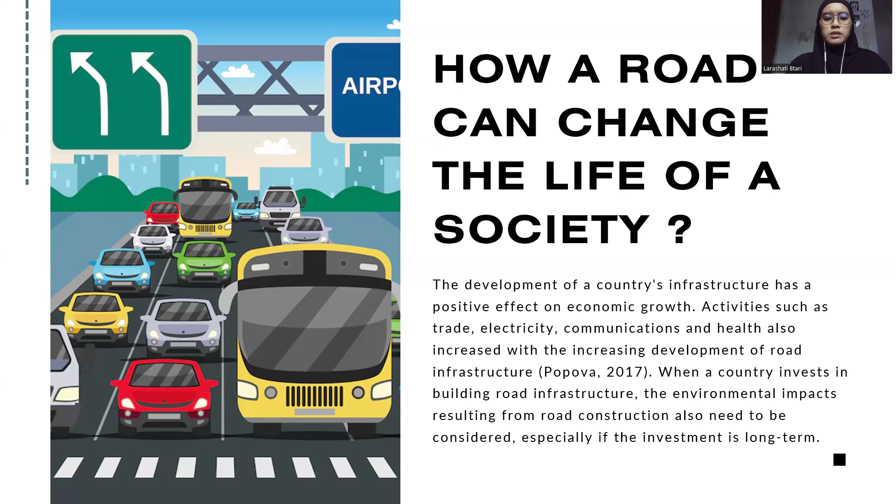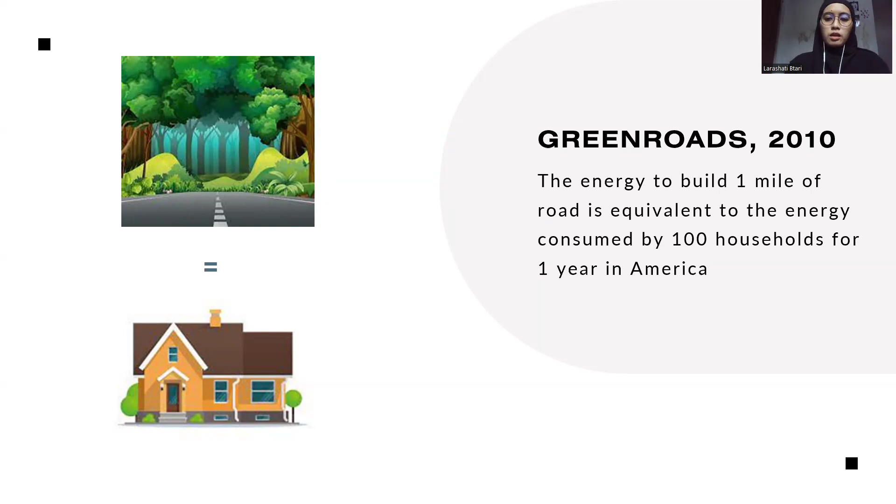According to Park and Han in 2015, the construction industry is the largest contributor to pollution, depletion of natural resources, waste, global warming, and climate change. The energy to build 1 mile of road is equivalent to the energy consumed by 100 households for 1 year in America. The carbon emissions produced to build 1 mile of road are equivalent to the carbon emissions produced by 210 passenger cars in 1 year.

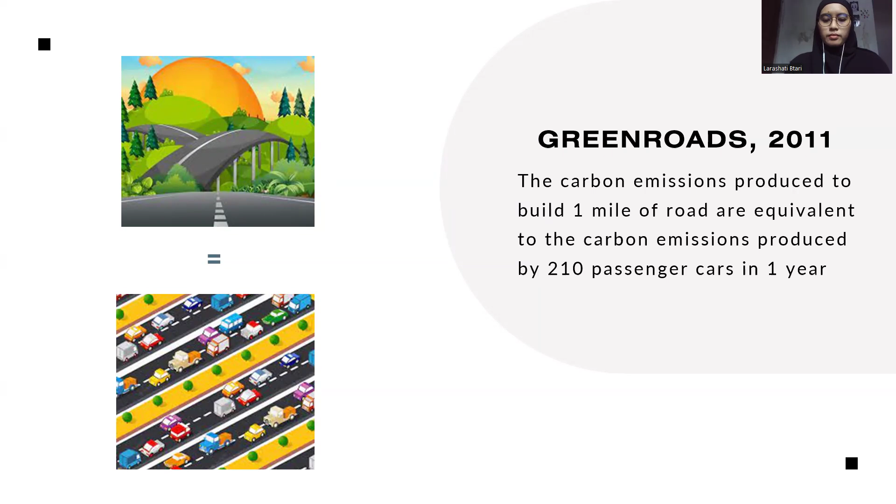So the question is how to minimize environmental damage due to construction, especially road construction. In the past, most road projects only aimed to promote economic growth and create jobs. Therefore, throughout planning, design, construction, maintenance, and repair, the environmental impacts were often overlooked. The construction process not only generates large amounts of waste and pollution, but also consumes large amounts of natural resources. Therefore, a sustainable approach needs to be applied in construction projects, especially road construction.

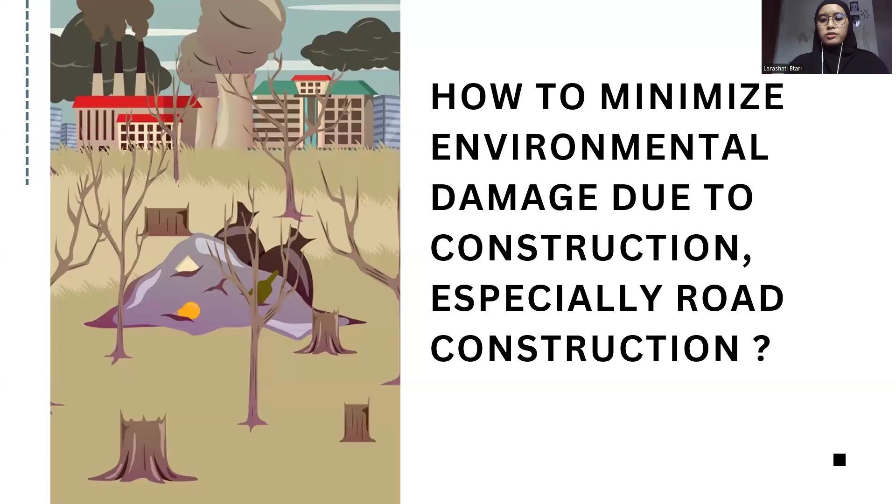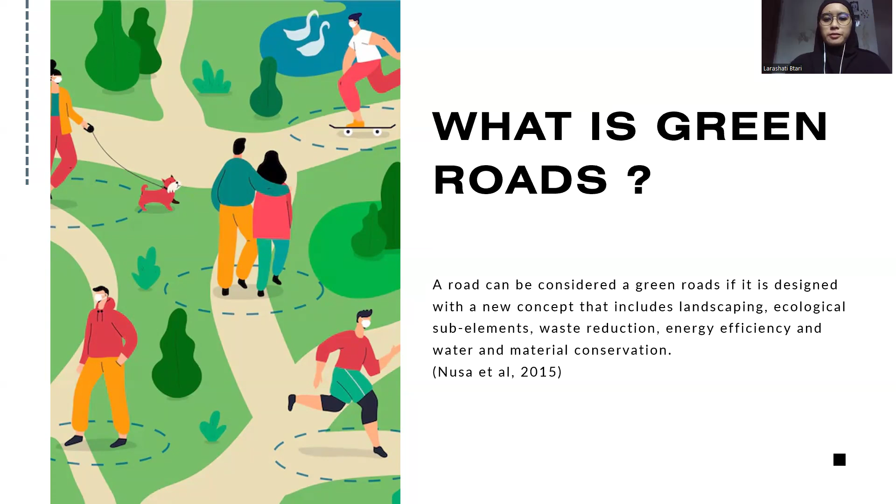Green roads are road construction projects that are planned and developed to a higher level of sustainability than existing standard practices and use green and low pollutant materials during the construction process. A road can be considered a green road if it is designed with a new concept that includes landscaping, ecological sub-elements, waste reduction, energy efficiency, and water and material conservation. The green road concept not only focuses on environmental protection but also benefits local communities by providing employment during construction.

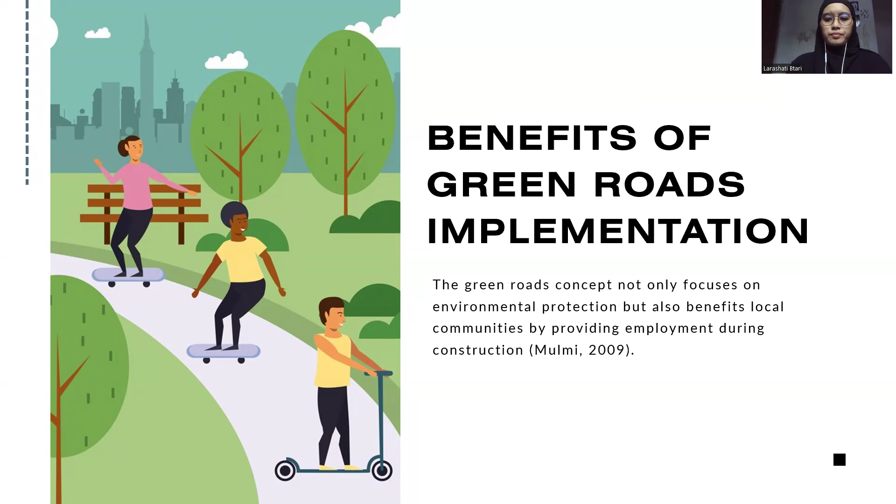Green road ranking guidelines in Indonesia consist of 5 categories. Number 1 is environment conservation: water, air, and nature. Number 2 is transportation and society. Number 3 is construction activity. Number 4 is material and natural resources. And the last is pavement technology. These categories are further divided into 35 subcategories and 84 criteria.

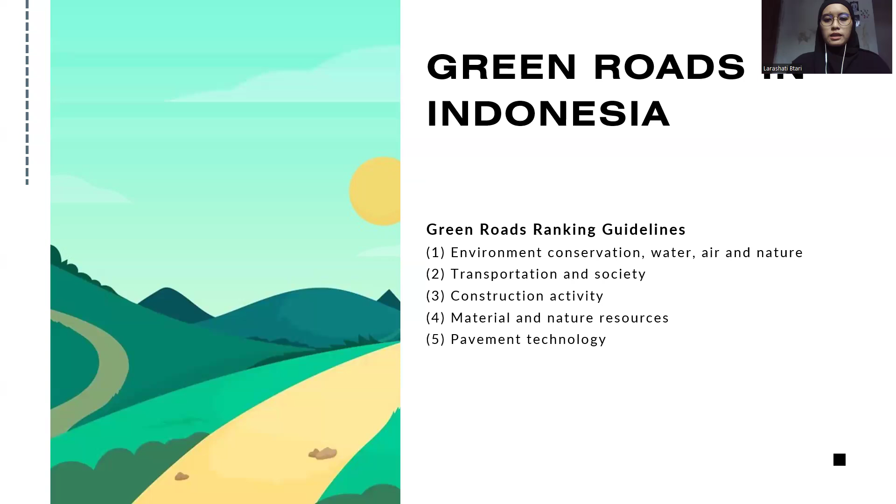The aim of this research is to model a framework for green roads implementation in Purworejo Regency with ease of implementation and waste reduction criteria. The framework can be used as guidance on implementing green road construction for stakeholders in road construction projects and bridging the gap between industry and academia.

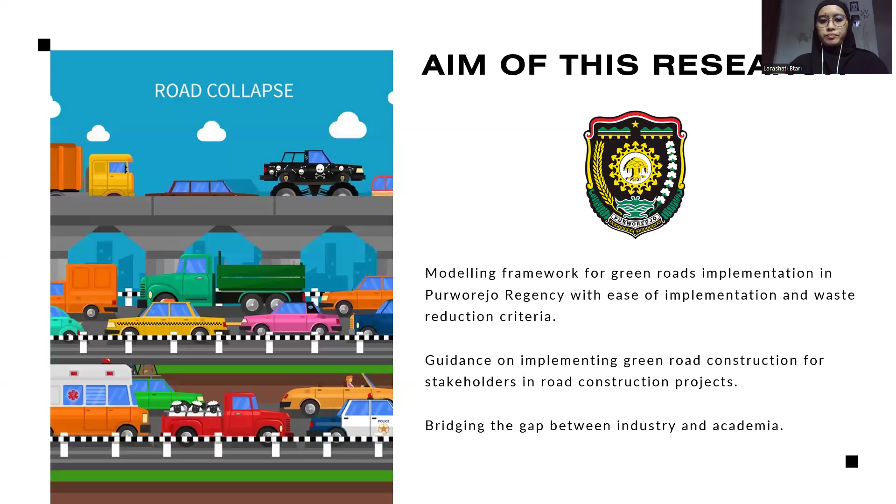This research uses primary data and secondary data. Primary data is responses from respondents obtained through filling out questionnaires, and the secondary data is data related to stakeholders who are involved in road construction projects in Purworejo Regency. The respondents of this research are the core stakeholders involved in road construction projects in Purworejo Regency, consisting of owners, contractors, and consultants.

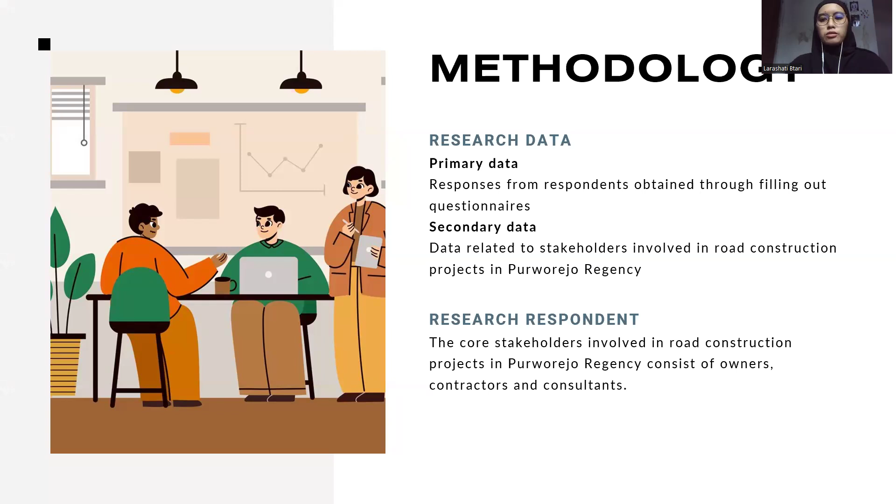Data analysis used in this research is the technique for order preference by similarity to ideal solution, known as TOPSIS. TOPSIS is used in this research because the concept is simple and easy to understand, computationally efficient, and has the ability to measure the relative performance of decision alternatives in a simple mathematical form.

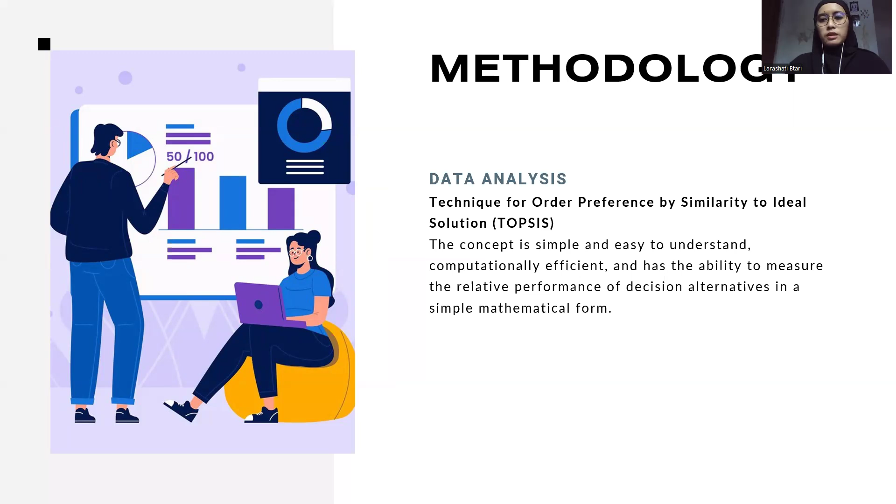The first result of this study is for environmental, water, air, and nature conservation, with the highest preference being reducing air or dust pollution during construction or post-construction. Dust is divided into two types, namely coarse dust and fine dust. If inhaled, fine dust can cause respiratory problems and acute recurrence of bronchial asthma.

Reducing air or dust pollution can be done by providing trees. Various types of plants can bind dust to the surface of their leaves. Several types of plants that are resistant to absorbing cement dust include mahogany, tanjung, canary, and red meranti.

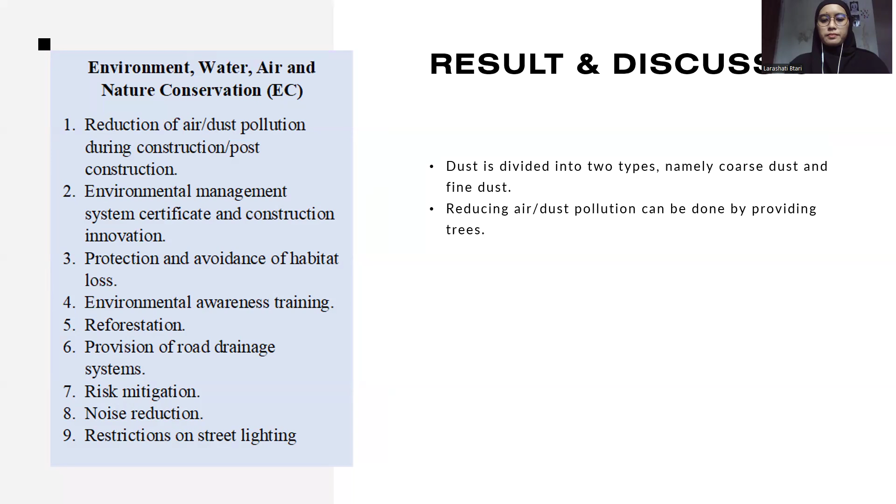The second result is for the transportation and society category, with the highest preference being the provision of pedestrian access and facilities. The results of this research are in line with Law Number 22 of 2009, that every road used for public traffic must be equipped with facilities for pedestrians and people with disabilities. Pedestrian access and facilities are also very important, especially for areas with the transit-oriented development or TOD concept.

The second preference is the provision of access and facilities for public transport users. This is linear with the first preference, where providing access and facilities for pedestrians is usually followed by providing access and facilities for public transport users.

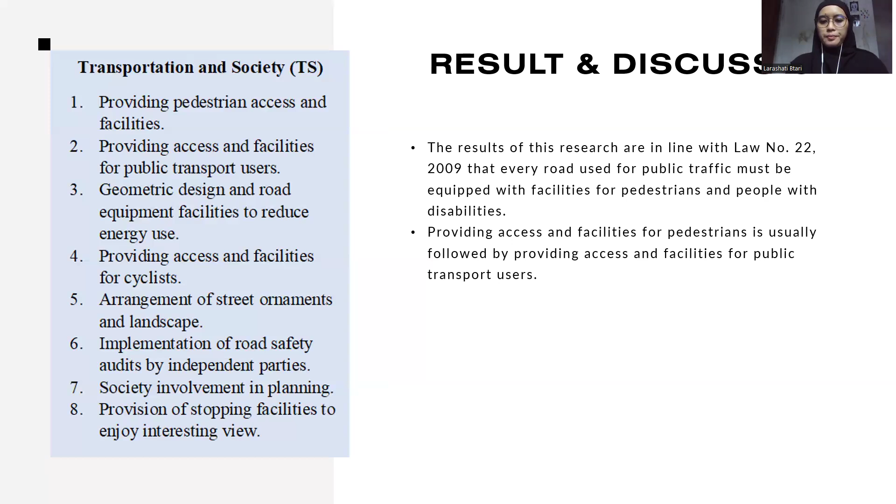The next result is for the construction and activities category, with the highest preference being quality of construction implementation assurance by the contractor that the construction product meets the quality of the tender process. One of the success factors in road construction projects is the implementation of effective quality assurance programs, according to Zachawerus and Soekiman in 2018. The second preference is coordination between designer and contractor for effective construction implementation time.

Communication and coordination is one of the main obstacles in completing construction projects in Purworejo Regency. Communication and coordination between designer and contractor is very important in the construction process, because basically the construction process is a transformation from conceptual or architectural design done by designers into physical facilities done by contractors. So it is natural that team coordination and communication becomes the second preference.

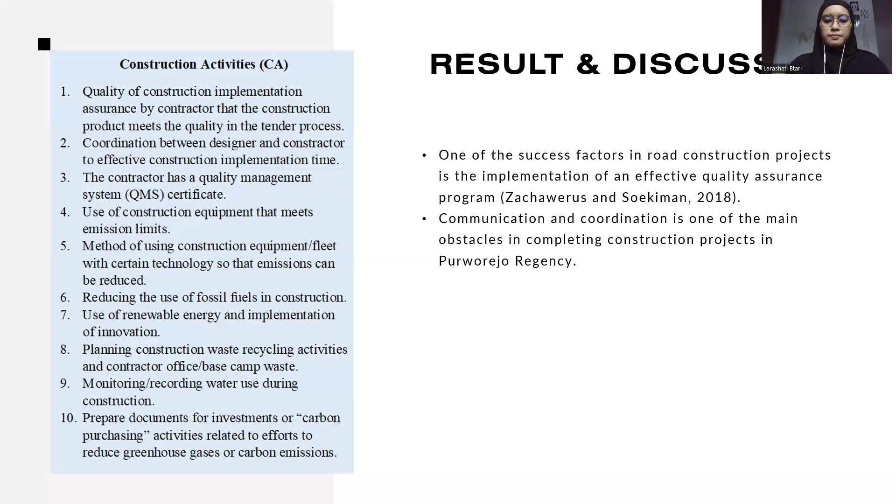The next result is for the material and natural resources category. The highest preference is the reuse of dismantled materials other than soil at the local location. An example of dismantled material other than soil that can be reused is dismantled road asphalt as road foundation layer material. The research conducted by Widodo et al. in 2013 showed that the addition of 0.5% and 2.5% cement can improve the CBR value by 36% and 94% respectively, so that it can be used as lower foundation and upper foundation material for highways.

Apart from dismantled asphalt, another dismantled material that can be used is from demolished concrete roads. Based on Angka et al. in 2022, the characteristics of the concrete road demolition material fragments meet the coarse aggregate specification, so they are suitable for use in AC-WC mixtures.

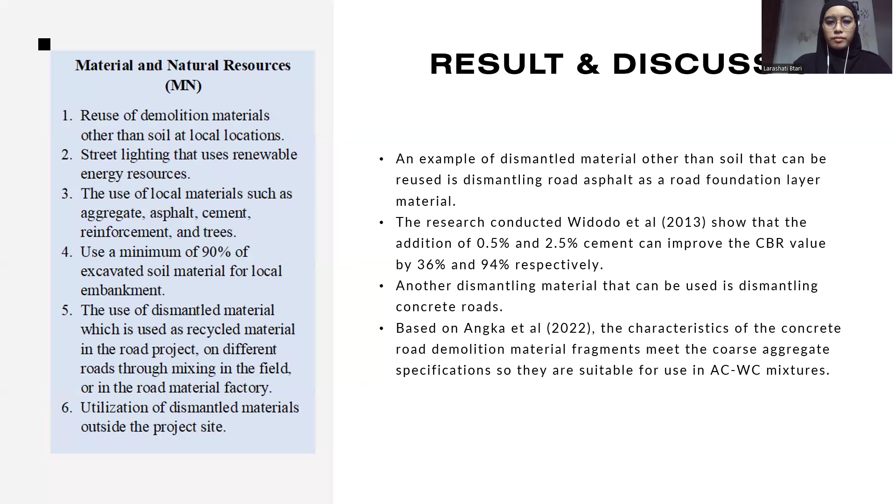The noise value of double layer porous asphalt pavement is generally lower than other conventional pavement. Placing a thinner top layer with a finer aggregate results in lower noise values. This provides a sense of security for road users and a sense of comfort for residents who stay close to the road network, according to Hardiman et al. 2008.

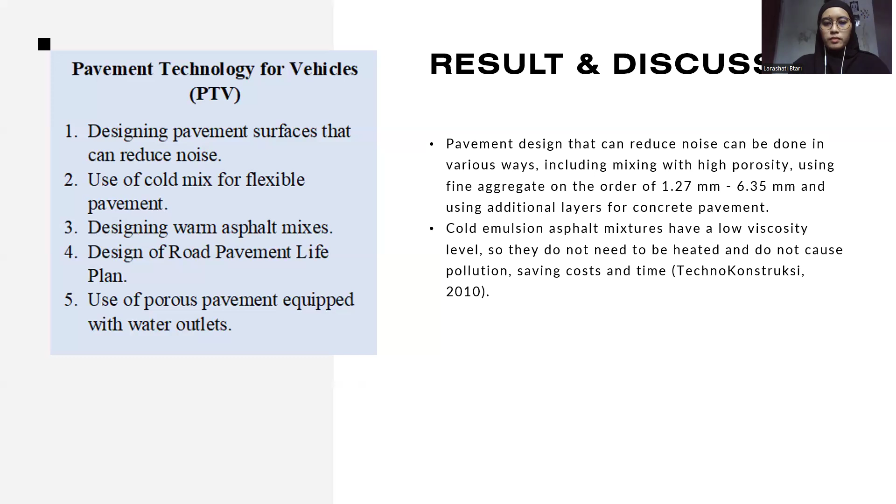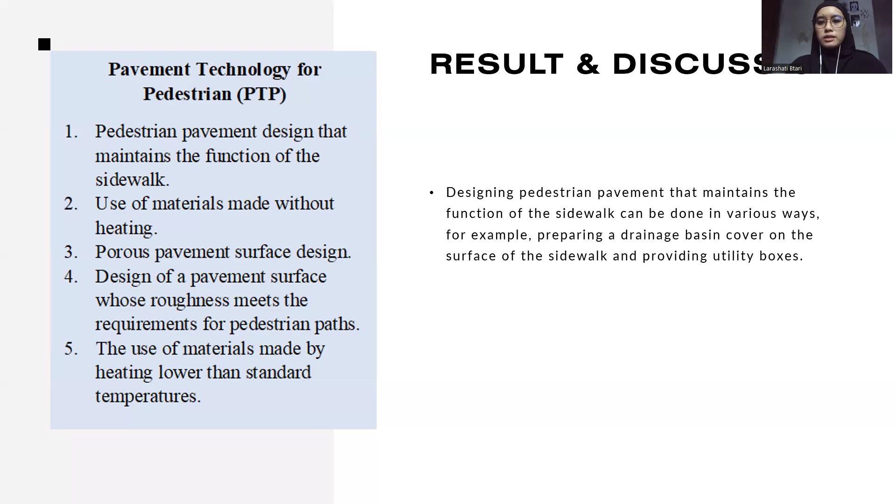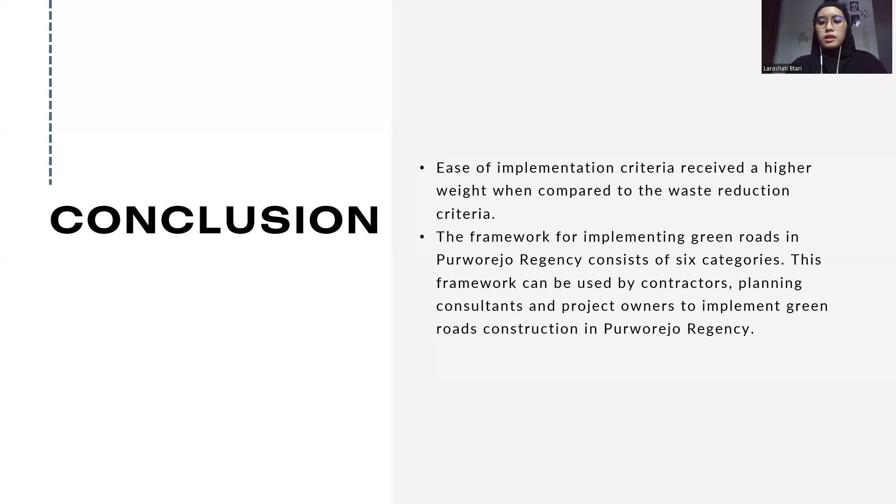This research aimed to create a framework for implementing green roads in Purworejo Regency based on ease of implementation and waste reduction criteria. Based on data analysis, it was found that the ease of implementation criteria received a higher weight when compared to the waste reduction criteria. However, the difference in weight between the two criteria is not very significant, and both are still included in the important category. The framework for implementing green roads in Purworejo Regency consists of 6 categories. This framework can be used by contractors, planning consultants, and project owners to implement green road construction in Purworejo Regency.